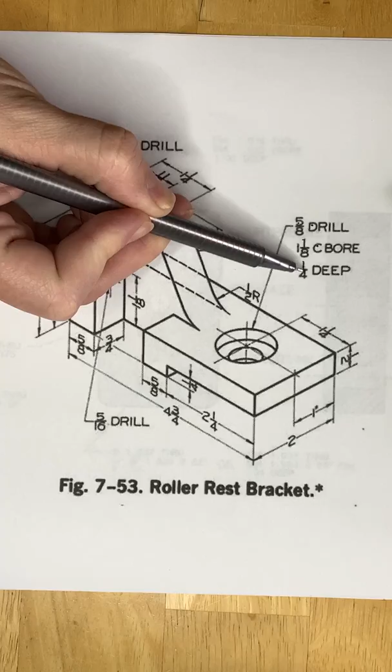So the 5/8 drill is the hole that's going all the way through. The 1 1/8, that is the counterbore, and then the 1/4 deep is the distance from here to here. That's the depth of that counterbore.

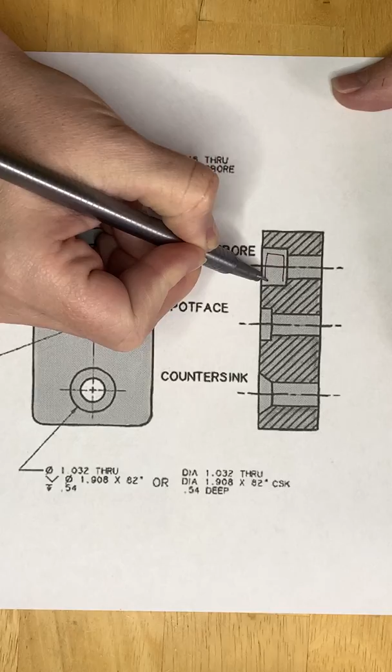So what a counterbore is, this is used to drill into a part. When I put a bolt or a screw into this piece of material to hold it to something else, the head of that bolt is going to go into that material and make it flush. Same thing with a screw.

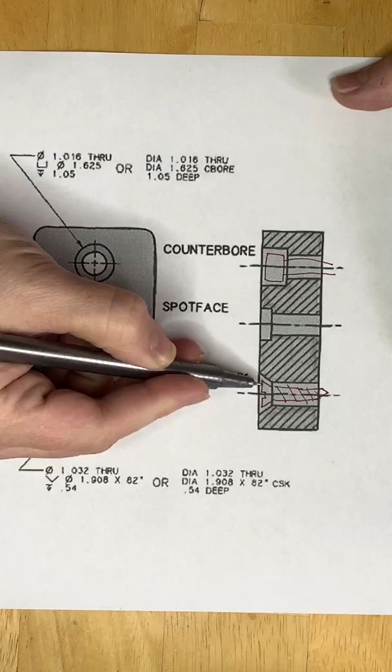The screws have those little angled edges, so this would be where that screw head would go into that material and make it flush against the side, so you won't have that bolt head or the screw sticking up out of the material.

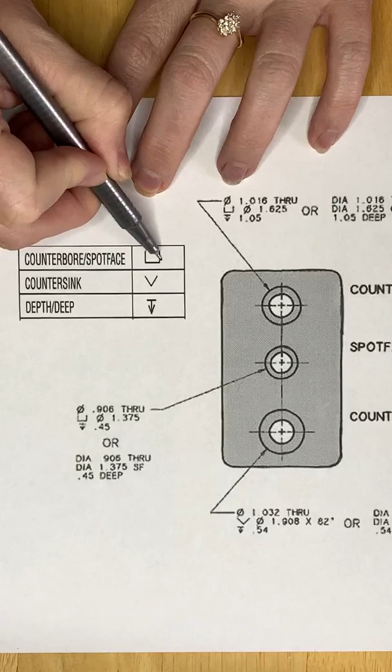So a countersink deals with the screws and a counterbore deals with the bolts. You will have symbols that show sometimes when you see a counterbore or a countersink, and you also have the depth symbol because it's going to tell you the depth of your counterbore.

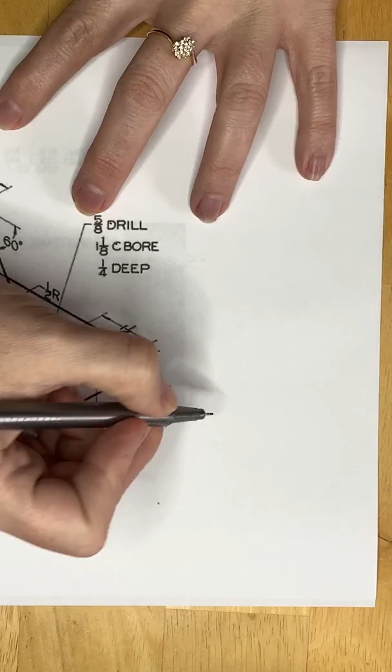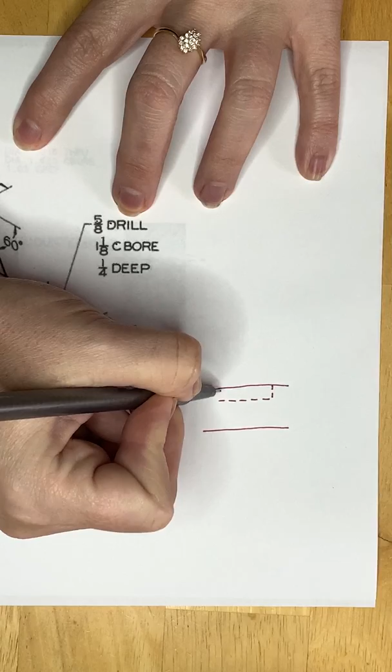So when you're looking at the counterbore from the side, you're going to see what the measurements tell you. So you have your material, and then you've got your 1 1/8, but it only goes 1/4 deep. And then you have the 5/8 hole that goes all the way through. So from the side, that's what a counterbore is going to look like.

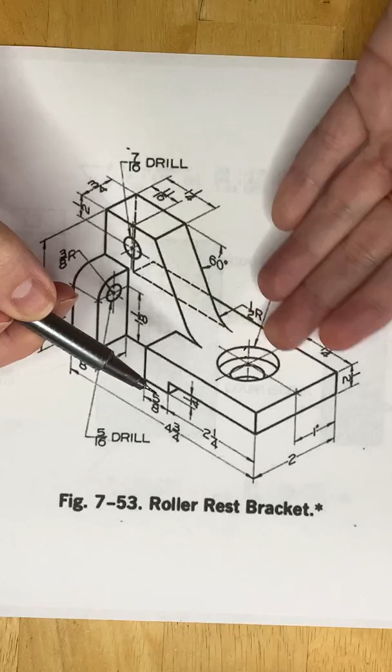So let's talk about the part itself. This feature on the front of the part is not on the back of the part. These hidden lines show you that this back piece goes all the way through. So you have your overall height, your overall width, your overall depth. This is the front of the part.

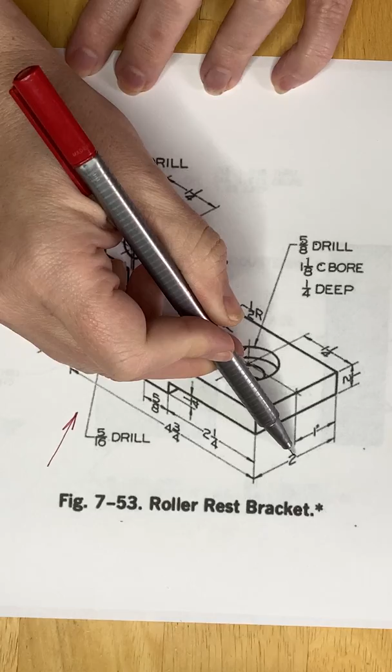So you have to just pay attention to what is cut away, the angle, the fillet where the counterbore goes through. When you offset for these features, remember it's only 2 as the depth. So you can't just offset 3/4 and then go 3/4 from the other side, because 3/4 plus 3/4 plus 3/4 does not equal 2 inches.

So pay attention to your measurements, pay attention to your sizes of your holes. You have different size holes and radii for your fillets and rounds. So make sure when you label this, go to your diameter dimension, place the diameter dimension, and then edit it to say all the features of your counterbore.

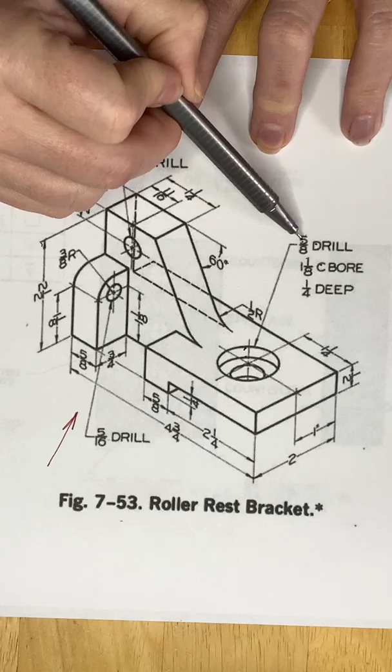This one doesn't include the symbols, it just writes everything out, so that's what you're typing in your dimension. So this is back into a layout C title block, and we are going to just do the top, front, right side with the dimensions.